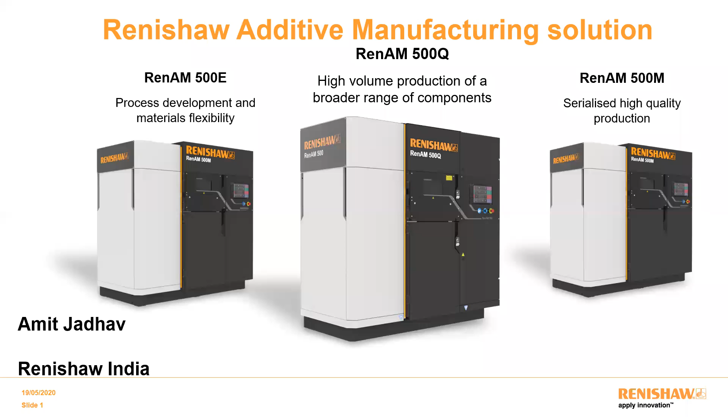During this presentation, we'll see what exactly Renishaw is, what's our core business, why Renishaw, then what is 3D printing. Specifically, we'll look at metal 3D printing, what it is, how it's affecting current applications, and its use. We'll see the entire process chain, how it flows from the CAD model to the final finished parts. We'll quickly overview the benefits of 3D printing, factors considered for metal 3D printing, and I'll focus on some metal 3D printing applications widely used nowadays. Last but not least, our offerings in a few slides.

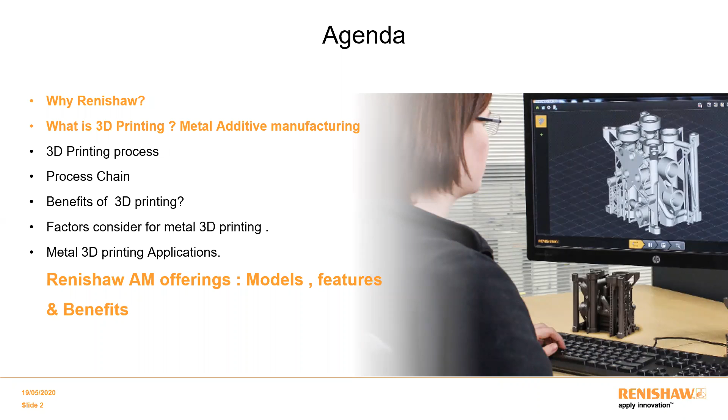So this is about Renishaw. Renishaw's core business is metrology and inspection. Apart from additives, Renishaw's main business is metrology, where quality is required. We have our own products like CMM measurement probes, machine tool probes, and gauging systems. Apart from that, we also manufacture a product called Raman spectroscopy to detect the chemical composition in pharmaceutical industries, for example medicine or tablets. For detection of these composites, we manufactured Raman spectroscopy, widely used in pharmaceutical industries. We also manufacture robotic arms for delivery of drugs in critical operations.

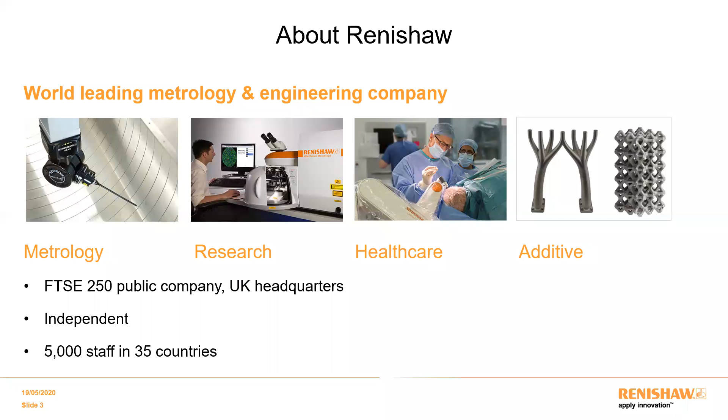Apart from all this, we also manufacture machines for additive manufacturing in metal. Specifically, we don't deal in plastic. In metal, we started our journey in 2011 when Renishaw bought a company in the UK called MTT Technologies, who were in metal 3D printing for the last 20 years. Since then, from 2011, we started manufacturing the machine in the UK. Renishaw is an FTSE 250 public company. Our manufacturing facilities are in the UK, Ireland, and partially in India, with more than 5,000 staff in 35 countries.

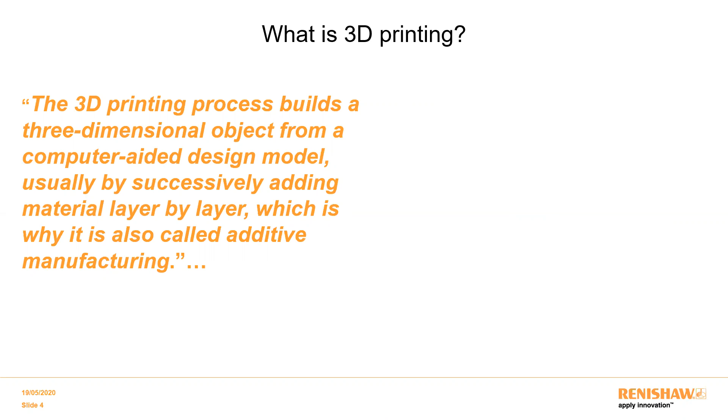So we'll start the presentation with 3D printing. This is a basic definition from Wikipedia: 3D printing is any 3D CAD model which you design in the computer, and you get the physical appearance through machines — that's called 3D printing. Nowadays, 3D printing is also known as additive manufacturing, which is exactly the reverse of subtractive manufacturing. It's called additive because it's an addition of layer one over the other. So rapid prototyping, 3D printing, additive manufacturing — these are a few terminologies of 3D printing.

Nowadays it's very popular — plastic has almost reached every home. But for metals, yes, the Indian market is maturing day by day, and people are starting to use and take advantage of metal 3D printing across applications. I will also go through the applications later in the slides. So 3D printing is nothing but additive manufacturing — when you design something, you get exactly the same component with the same dimensions from the machine, without any manual intervention. That is what is called additive manufacturing.

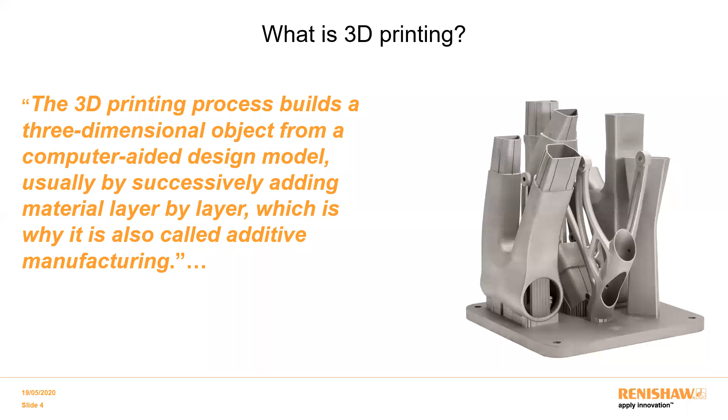So this is the basic things. There are two differentiations in 3D printing. One is polymer, one is metal.

Polymer, I hope everyone is aware about polymer 3D printing, or many of you have seen metal 3D printing as well. In polymer, the popular technologies are there, very popular nowadays, and each and every manufacturer has manufactured their machine on the basis of this technology. So in polymer also, there are four major technologies, and on the basis of that, manufacturers have manufactured their machines.

Fused deposition modeling, where raw material is in wire form, gets fused with high temperature, and then layer by layer manufacturing happens. Selective laser sintering, I hope you are aware, is a powder and laser based technology.

And then stereolithography. Apart from that, inkjet technology now. Stratasys has already launched that technology a long time back, but now with some new innovations, HP has launched their machine in polyjet or inkjet technology, where raw material gets sprayed on the bed, and with the help of UV light, it gets sintered and then solidified.

In metal, similarly to plastic, metal also has a few technologies like selective laser melting, short form SLM, or direct metal laser sintering, or laser powder bed fusion. The terminologies are different, but if you see, the technologies are almost similar. SLM, DMLS, and LPBF - most of the time people use these short forms. The terminologies are different, but the technologies are similar.

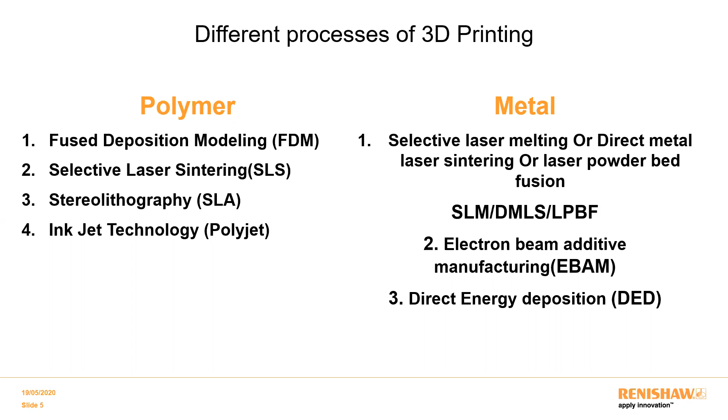Like plastic, you also design the part, then you print, giving that input to the machines, and then start manufacturing the parts, then remove the parts and remove the support. In metal also, two factors are considered: support structure and the actual material.

Support is less than 10%, depending on how you orient the part. So the process starts from designing the part, and once you design it, save it into STL. Like plastic, metal also accepts STL data. In fact, all 3D printing technologies ultimately need to be converted into STL format, whatever format you design the part in, and then give this input to the machine software.

In the machine software, it gets programmed. You will get the number of layers, number of hours, and amount of material required to manufacture the part. Then you start the process in the machine. Once it is done, you remove the part and measure it as per your dimension - if it's not printed correctly, you need to machine it out, removing unwanted materials and support structures until the final part comes out. This is the basic flow, which remains the same throughout all metal technologies.

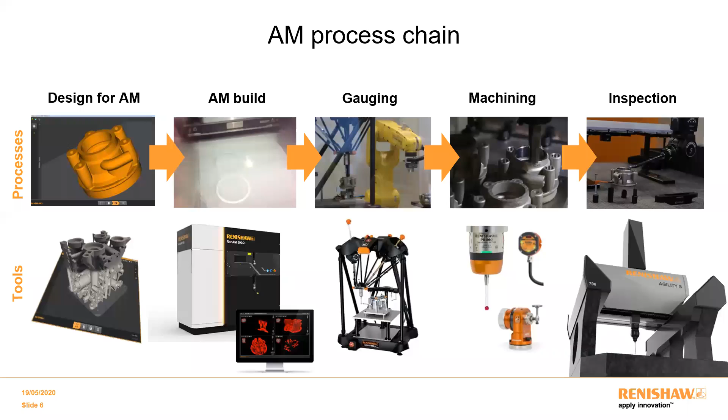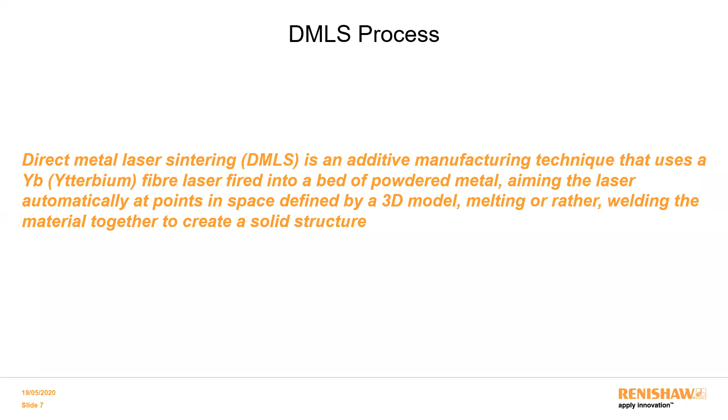So DMLS, again the definition from Wikipedia: DMLS is the process where a laser source solidifies the powder, and layer by layer manufacturing happens as per your CAD data.

I'll just play the video - please let me know if this is not visible. This video has no sound. This is our multi-laser sintering machine, which is high-end, but the terminology and technology remain the same. See this video for 3D printing - we shot this video from our own machine. I'll play it now.

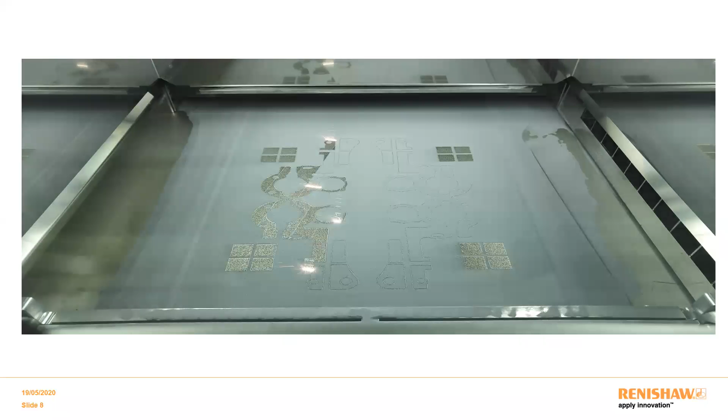How is sintering done? There is a layer of powder spread across the platform, and sintering happens with 4 lasers simultaneously. You can define the layer thickness as per your requirement, from 20 micron to 100 micron, selecting based on the profile and the accuracy required for the part.

Again the new layer will come and the process will continue.

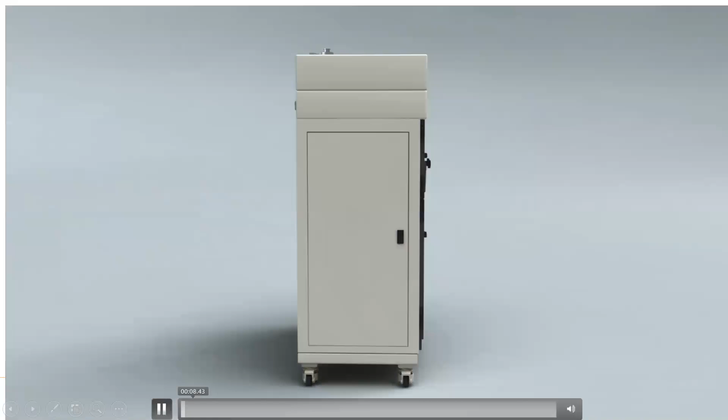Now, in this video, I will explain from the start to the complete removal of the parts, how the machine works, so that you will understand easily. I believe seeing is believing - that's why I'm playing this video.

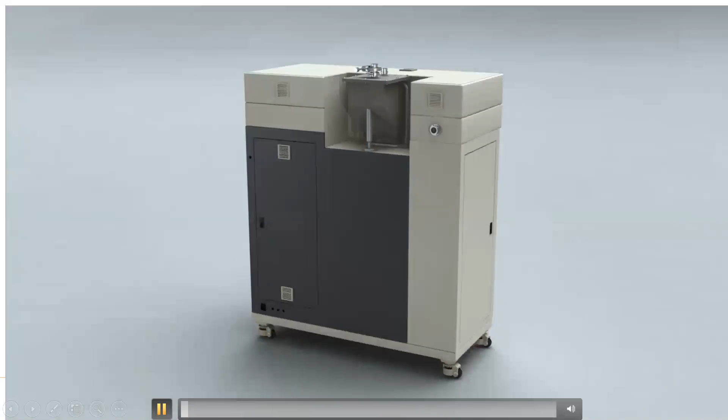How the powder gets deposited into the machine, how it's spread on the platform, how the laser works, and how we remove the parts - by seeing this video, most of your doubts will get cleared, and I'll explain further. From the backside of the machine, powder gets loaded into it.

Whatever the powder - aluminum, stainless steel, nickel alloy, titanium, cobalt chrome, whatever material is required - you just put that powder into the machine. This is a hopper at the backside of the machine where we load the powder, feeding it through this flask.

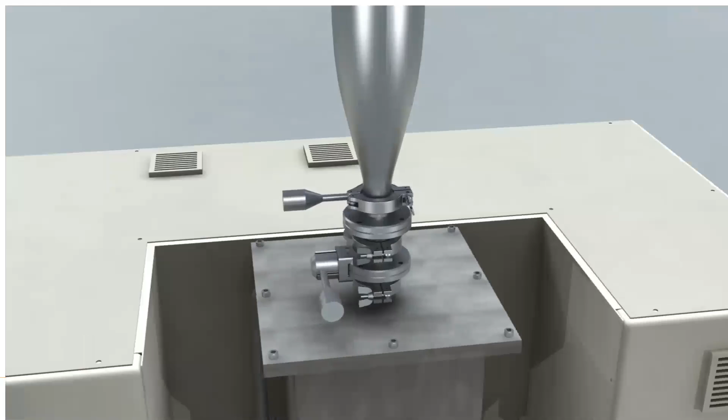During the entire process, the powder does not get exposed to the external environment, so it does not oxidize, and you get better mechanical properties and better quality parts. This is a basic view of the chamber.

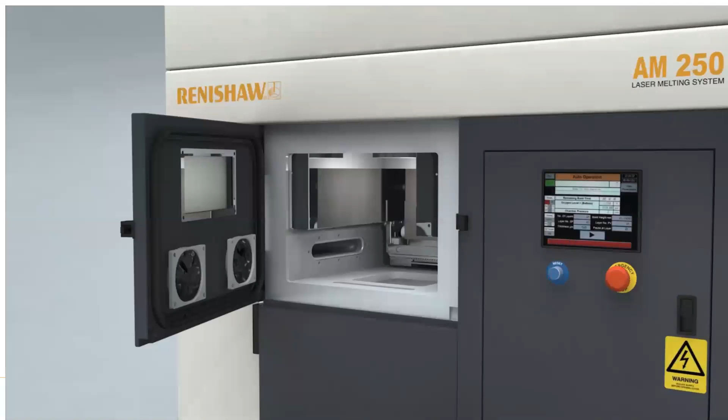Now the substrate gets placed into the machine. 250 by 250 is the bed size and height is 250 mm. On that substrate, the machine software is preparing the CAD data.

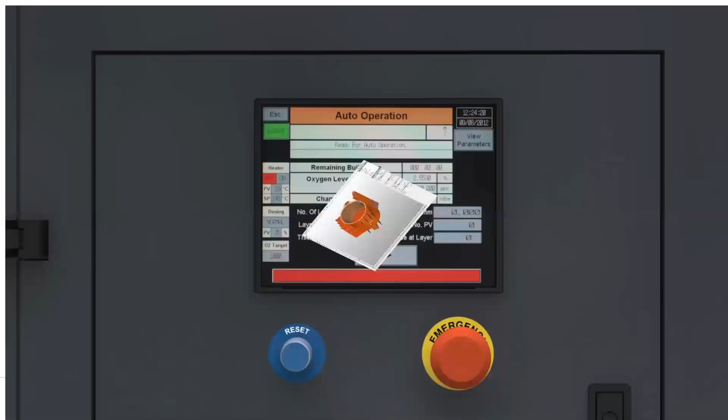It converts the data into a number of slices and support structures we need to generate for the machine, then we give this input to the machine.

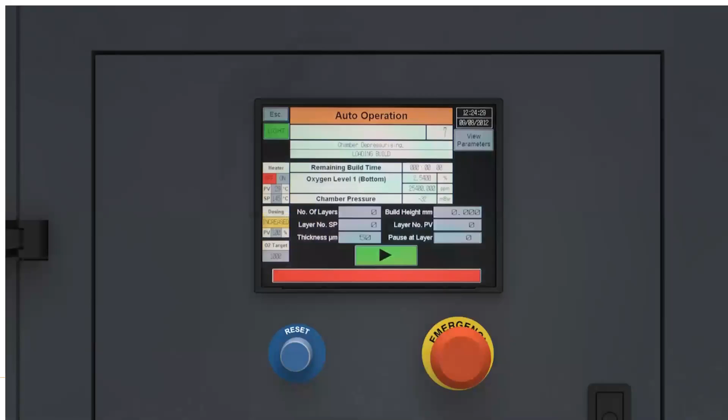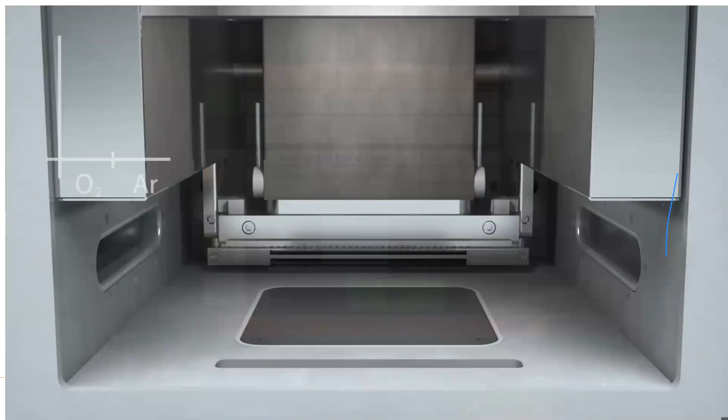The machine ensures proper gas levels inside - we remove the oxygen from the machine. This is chamber preparation to avoid oxidation of the powder. We remove all the oxygen and then purge argon gas to maintain purity during the manufacturing process, so argon gas flows in.

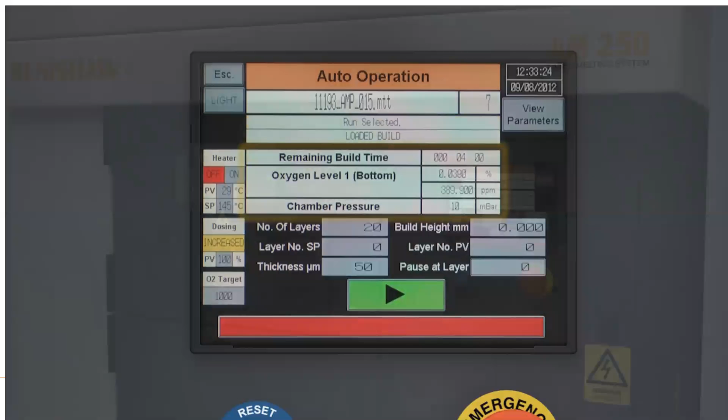We deposit a minimum of 900 liters of argon to avoid oxidation during the process and maintain minimum oxygen levels. This is the basic principle of 3D printing technology in metal. In plastic, you don't require all these things - yes, in SLS it's required, but other technologies don't need it.

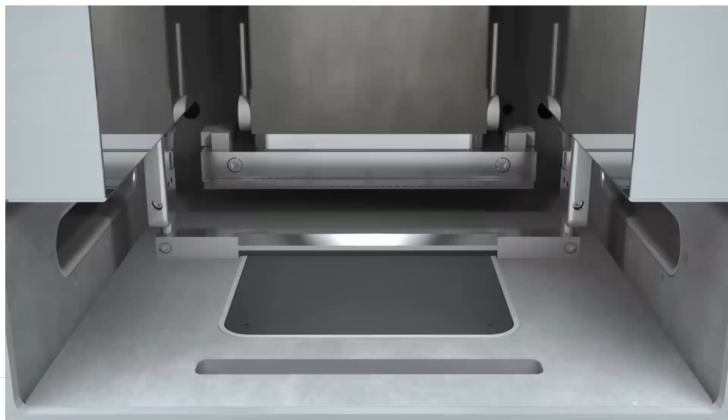Then through the laser source, it will start manufacturing. A recoater spreads a 30 micron layer on the platform, and the laser sinters it as per the geometry of the CAD part. This process continues till the completion of the part.

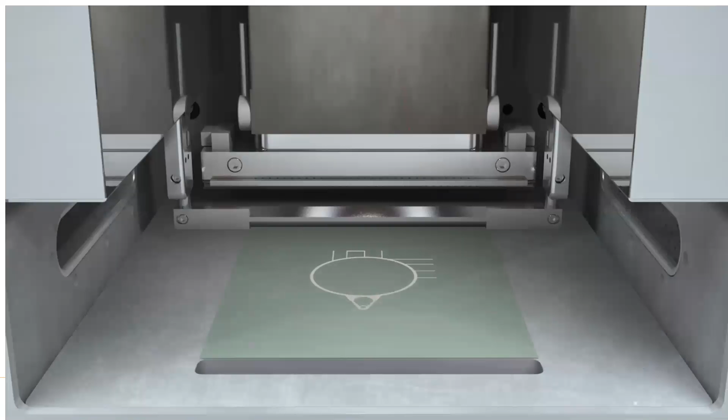Every time, the bed gets lowered by 30 micron or the desired height of the build.

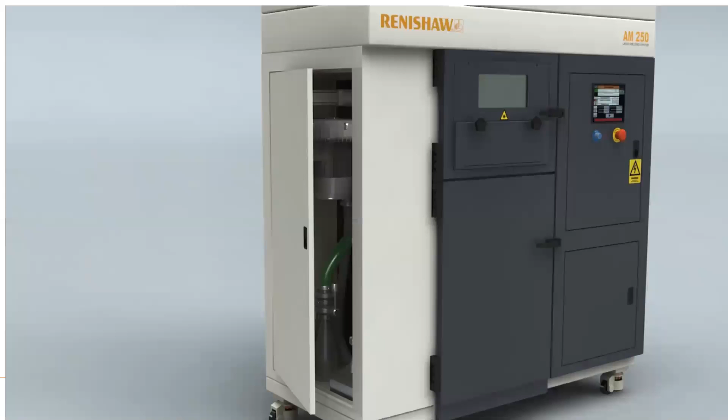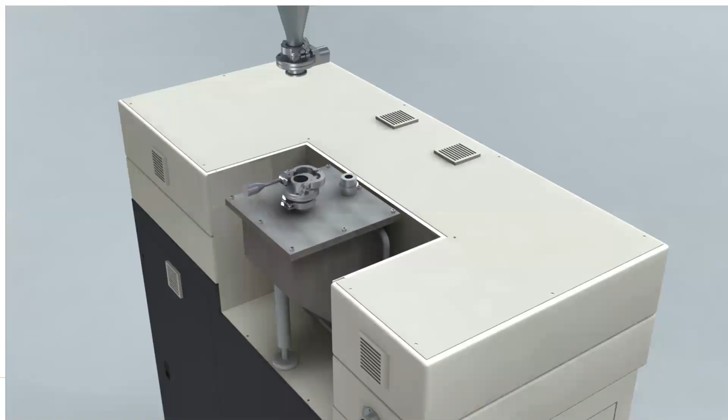The excess powder gets collected into the collector, and we sieve that powder, removing unwanted material from that collection. The fine powder is then reused for the next build. If you ask me, the wastage is very minimal in this process, and again we continue the process.

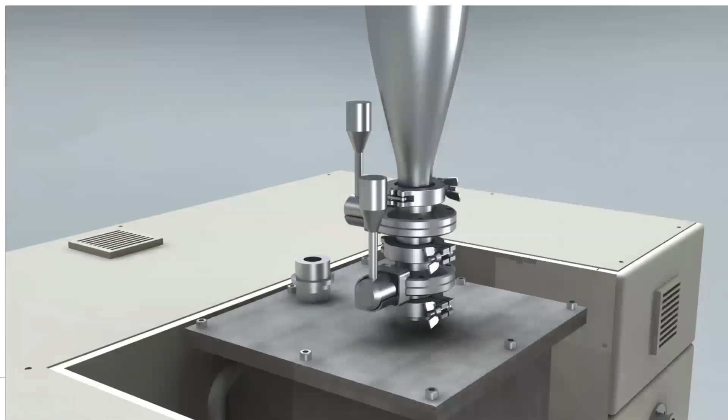This process is continued until the complete part is made.

Now we see the AM deployment, where it is beneficial or where it has been used so far, particularly the deployment of additive manufacturing in metal.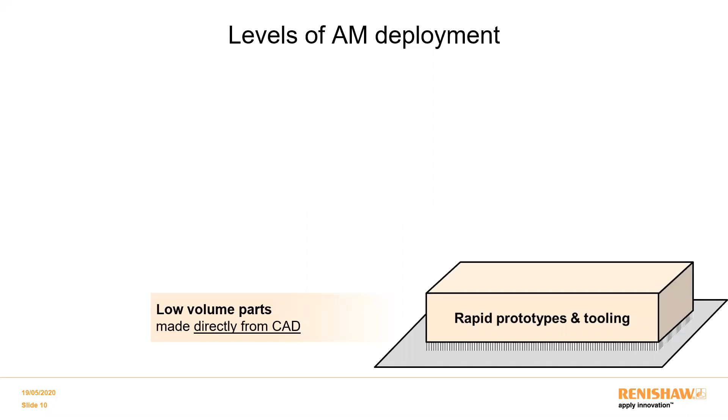Most of the time people are using additive manufacturing in metal for applications like rapid prototyping and tooling.

Then direct part replacement. This is one of the unique applications in metal 3D printing, where the volume is low and manufacturing cost is huge. For just 10 to 50 numbers, no one will give you dies and molds, no one can manufacture for you for such low volume unless it is very unique. In this case, you can use the part directly through metal 3D printing. You design the particular part, and if your volume is low, you directly use the same thing on the actual vehicle or engine. That is why it is called direct part replacement.

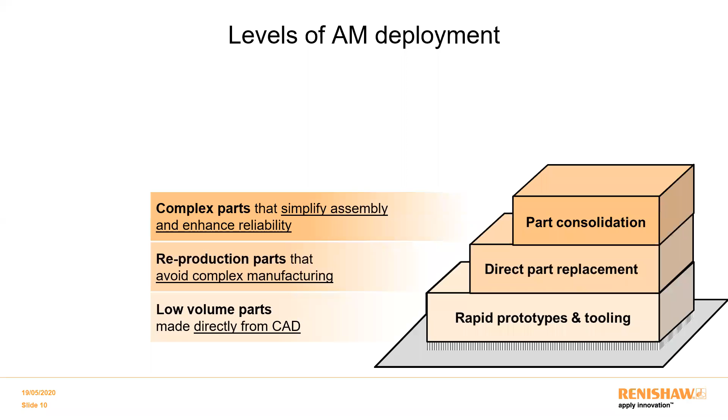Part consolidation: for example, in conventional manufacturing, if you want to make 5 to 6 parts and assemble them with nuts and bolts, but if you are able to design the entire assembly as a single part, then you can print or manufacture the entire assembly without adding multiple parts. As a single part, you can print it through metal manufacturing.

And last but not least, DFAM optimize. DFAM stands for design for additive manufacturing. Nowadays, in the aerospace or automotive industry, people are using design for AM to manufacture their conventional parts, to reduce overall costing and minimize time.

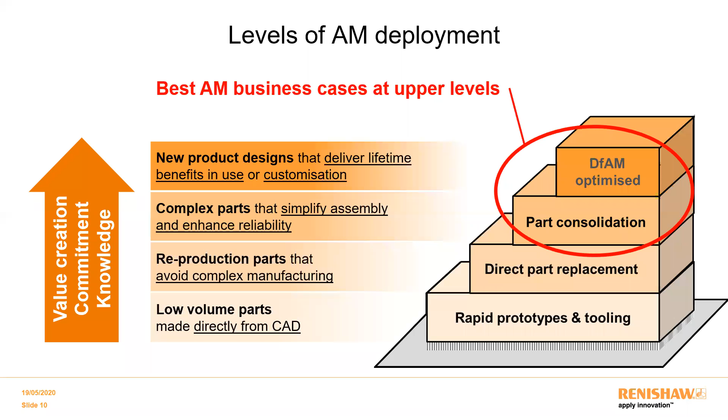So these are the best applications where AM is used nowadays: part consolidation and DFAM optimize. How it works, I will show you in the next slide.

If I select my component for metal 3D printing, my product gets benefited with less weight and faster product launching. Let's say I design in the morning, and in the evening while going home, I give this input to the machine. By midnight, the machine will print that part. Next morning, you get the part in your hand. This is the main benefit of 3D printing.

Then product reliability is there. Whatever you have designed, you will get exactly the same, with whatever parameters you set during the design of the part.

Higher performance: metal 3D printing is one of the most reliable technologies where you get higher performance than any other technology. Product attraction is also there.

You can design the part however you want, whatever you decide to design. It's not like conventional manufacturing, where the designer thinks about manufacturing capability with respect to final production, designing the part in that constrained way, considering which machine to manufacture on, for example 3-axis or 5-axis, and understanding the constraints of conventional manufacturing. But in metal 3D printing there is no such limitation. You get the part exactly as it comes in your mind.

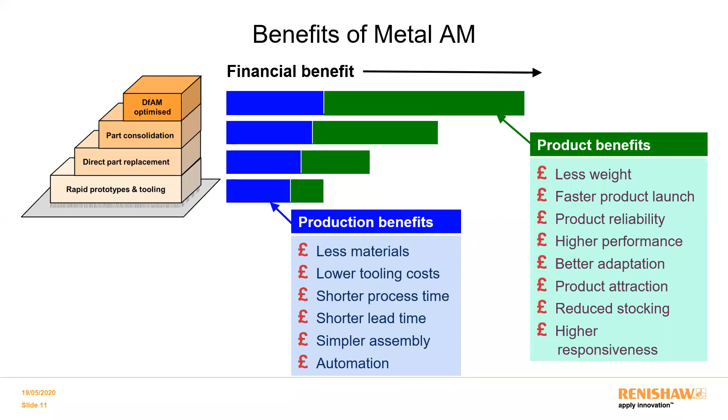Factors considered for metal 3D printing. In polymer, in plastic, thousands of materials are readily and easily available, and more or less people can buy it from the local market. You can buy your spool, or you can buy the powder from the local market, and immediately process it, because risk is minimum. If your part is not up to the mark in polymer, you can throw that part and print the next one, because cost is very less. In metal it's not like that.

Material availability is the essential thing in metal 3D printing. There are around, you can say, less than 50 metals available all over the world. Scientists are researching new materials day in and day out. But so far, as per my knowledge, 20 to 30 materials are readily available for printing.

Again, material selection depends on your final requirement. You cannot take any raw material and process it in the metal machine, because so many factors are considered. For example, weldability and the melting properties of the material are essential things in metal 3D printing. If you are not able to weld the material, or if you are not able to weld the powder, then there is no use of that raw material. That is the reason.

So far, stainless steel, aluminum, nickel alloy, cobalt chrome, titanium are widely used materials in the industry. Apart from that, if any other materials are there, you can anytime research it and make that material available for the applications.

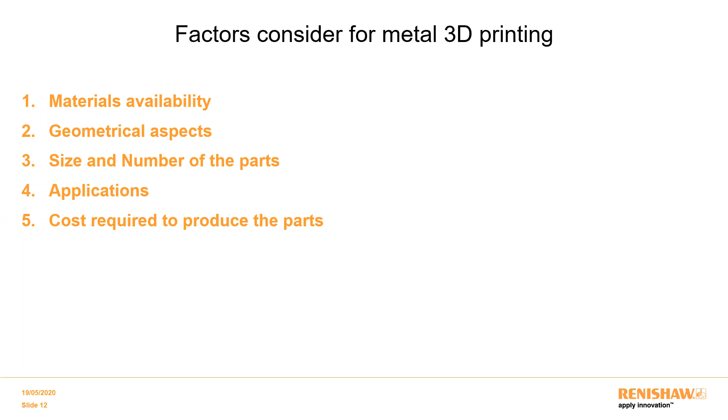As I said, metal additive manufacturing is best suited for high value and low volume parts, where your volume is very less and cost is very high. Then and only then you can use this technology.

There are many industries already using 3D printing, but I have shortlisted a few important ones: automotive, aerospace, tooling and dies, medical and healthcare, defense and security, and education and research.

We'll see one by one what are the different applications in automotive. There are hundreds of applications in the automotive industry. I'm trying to cover a few of them because of time limitations and for your understanding, so I have shortlisted some applications.

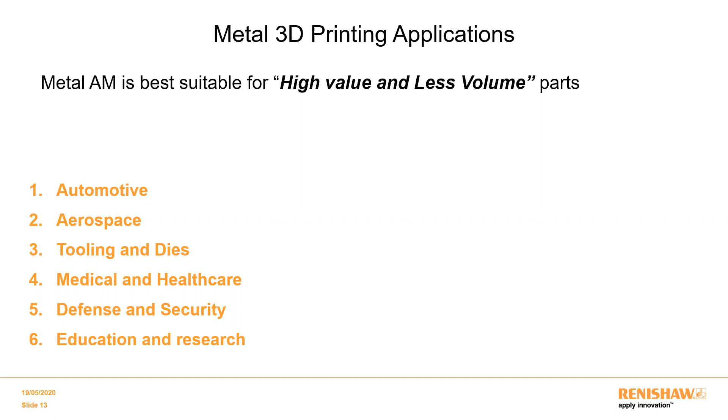Just see, we manufactured a nozzle tip for this supersonic car because volume is less and it's a unique application. In conventional manufacturing, you will not get that much angle and that much finish. Imagine this car is able to perform at 1,000 miles per hour. We used titanium material to manufacture the nozzle tip of this supersonic car. If I wanted to manufacture this in a conventional way, it would be a nightmare.

So that is the reason this is a unique application, like when you want to manufacture a limited edition car, and the uniqueness of the car is that it needs to perform in a certain way where the overall weight of the car is very vital.

In that case, you can select to manufacture with less weight to reduce the overall weight.

3D printing in titanium is very easy because it gets solidified and you get the part directly out of the machine. But no one will touch that part in conventional manufacturing because of the wastage. Titanium is very expensive, it's not a day-in-day-out material, and it's very challenging to cut. So most manufacturers avoid making things in titanium because of the wastage, the number of tools required to cut the material, and accuracy concerns. That is the reason 3D printing in titanium is very useful.

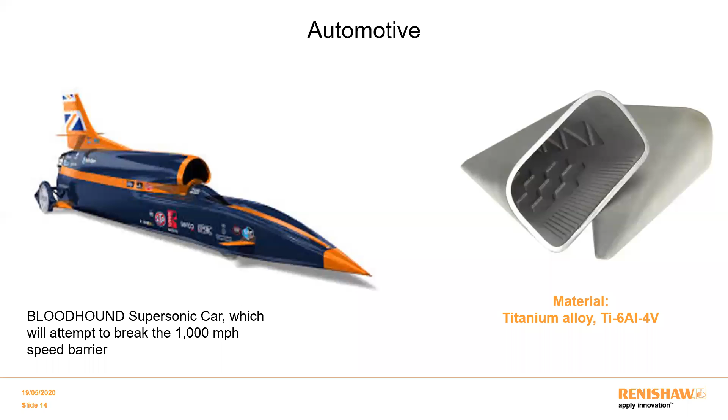Design for additive manufacturing is a concept, and here we have a car hinge, a door hinge for a concept car, manufactured in aluminum. If you look at this part, you'll understand it does not require support. We optimized the entire part using a Dassault Systemes software, a joint venture between Renishaw and Dassault Systemes for the concept car called Blue. We decided to manufacture this door hinge through metal additive manufacturing because there was very little space available and the weight of the part needed to be very low. We manufactured it in a vertical orientation where it doesn't require any support, but I believe in conventional manufacturing you cannot maintain this angle, making it very difficult to produce. In this case we only needed to manufacture 5 to 6 units, so it's easy to do through this technology. It's aluminum, very lightweight compared to conventional methods, and very unique in its application.

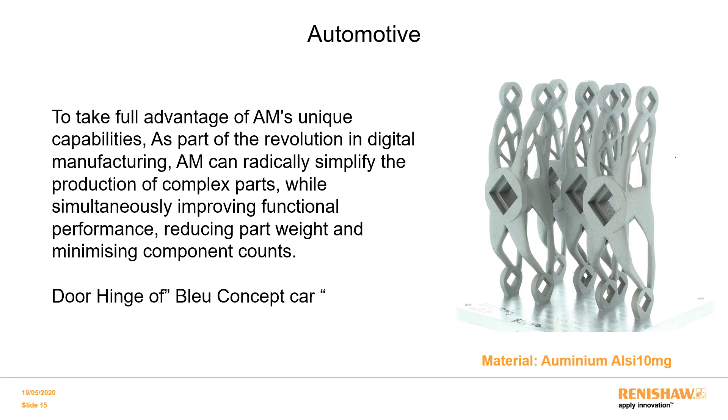Moog is a leading aerospace manufacturer. We designed this actuator, or hydraulic manifold, through this technology. Because of the intricate shape, we were not able to manufacture it using conventional methods, so we decided to manufacture it through 3D printing.

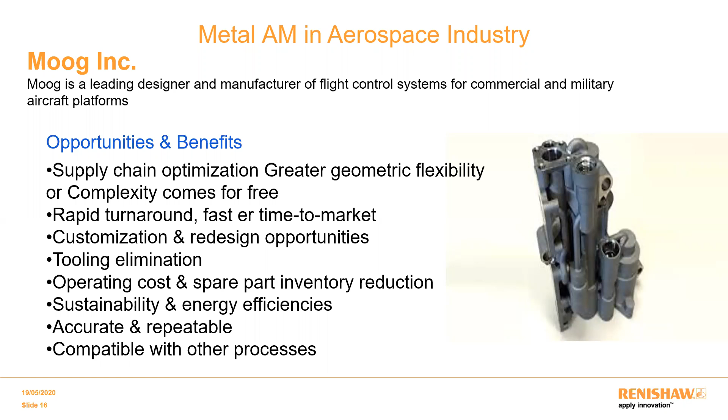For this Indian manufacturer, we manufactured this CAN combustor in Inconel 625, where the layer thickness was 60 microns, there were 4,600 layers, and the build time was 22 hours. We manufactured this part for aerospace industries at our Pune facility. Like this, if your volume is low, you can select any component within that dimension and easily get the part out of the machine.

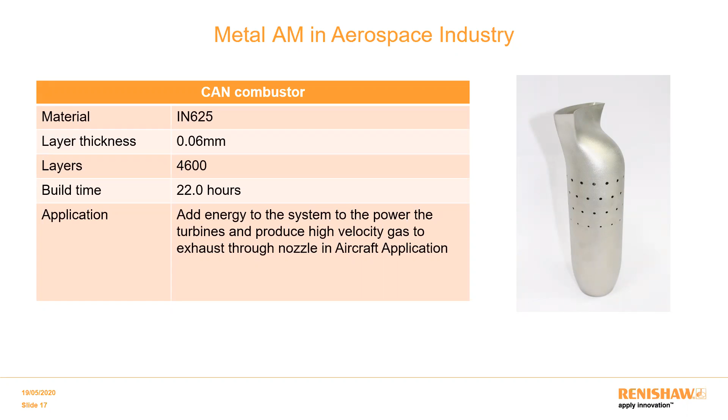Topology optimization is playing an important role in 3D printing nowadays. Design for additive manufacturing is one concept, and topology optimization is another. This is a bracket for a satellite, and you can see there's a honeycomb structure inside that part. We analyzed this with the help of Altair and Materialise software to optimize the part. We optimized it so that where it requires load or stress, we solidified that region, but for the rest of the structure we used a honeycomb pattern since it bears minimum load compared to a solid structure. That's why you see this honeycomb structure, which is very lightweight. This is only possible with 3D printing—you can't even imagine manufacturing this through conventional manufacturing.

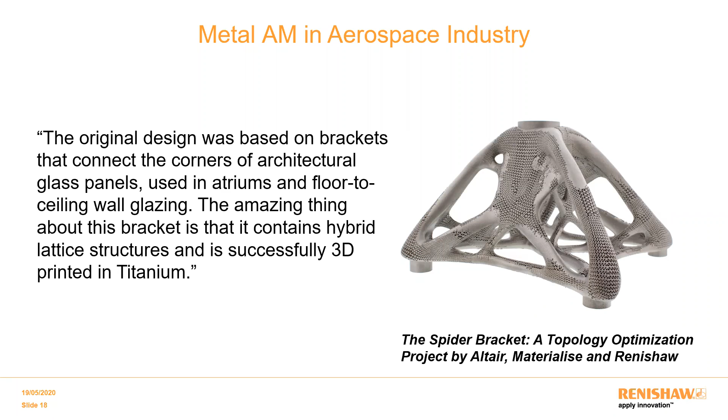Tooling and dies—in India, I've observed this is a sector growing very rapidly. In conventional tooling, most of the time the cooling channels are either along the x-axis or y-axis, or not very close to the profile, because of manufacturing limitations. It's a conventional manufacturing limitation.

Any tool designer will design in such a way that he should be able to manufacture through the conventional way, otherwise he will not design the part. But let's say that designer, if you ask him, design whatever way you think, design your inserts. Only thing is that I need better quality parts, and I need my mold to cool within less seconds.

So he will design cooling channels along with the profile of the part, so that you can avoid issues like warpage, shrinkage, sink marks. You can avoid that issue if you are able to cool down the mold very easily. In this tooling industry, we are able to design a cooling channel along with the profile of the part, or along with the profile of the insert.

Again, the cooling channels are simulated in particular software. You cannot just design as per the profile and manufacture the part, it's not like that. There are some simulations. So many geometrical aspects need to be considered, cooling channel need to be considered. But yes, once you are able to design the proper cooling channels along with the profile of the part, then metal 3D printing will give you the parts exactly the same as what you have designed.

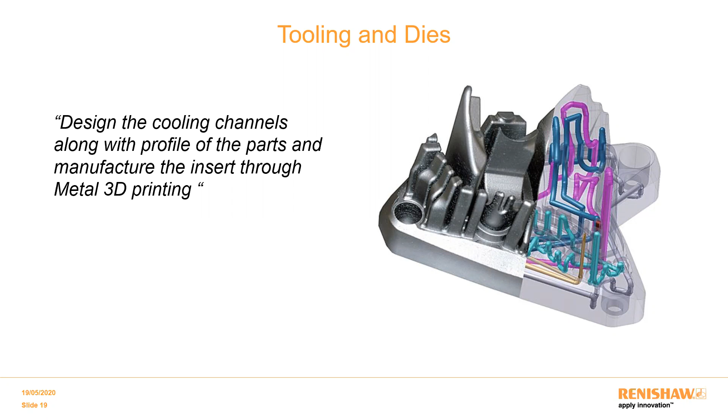Medical and healthcare in India, because of the limitations of surgeries, medical is an important application in 3D printing, where you can manufacture the actual cranial implant of the patient. You understand? Just think, each patient has their own requirement of the implant, each patient has their own challenges and problems. So volume is very less.

In fact, only one time you need to manufacture that implant, because it's patient specific. So conventional manufacturing is very challenging at the moment. People are still managing these things, but if they use 3D printing, their life is easier than the conventional way. Imagine cranial implants - you can see on the left hand side there is a cranial implant.

In cranial implant, you will be able to get exactly the same implant that your patient requires. For example, the affected area - I will explain the process of how it gets manufactured. The affected area gets scanned through CT scan data, and through the scan you will get data in CT scan format. You need to convert that CT scan format into 3D format, and through the 3D format you can print that part in metal 3D printing, in titanium material, or if it's a dental part, then it's cobalt chrome. If it's a maxillofacial part, then it's in titanium, which is very lightweight.

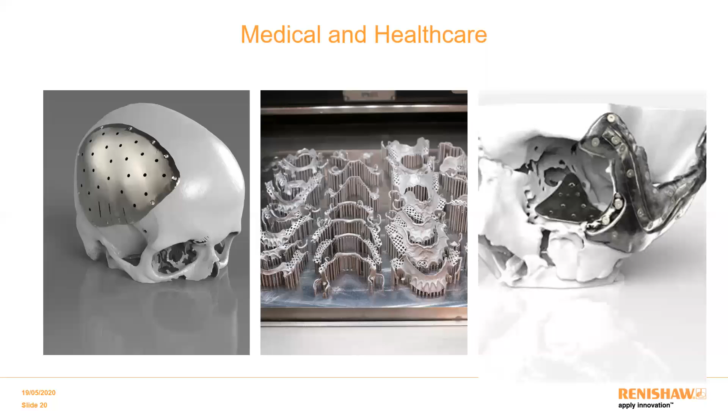So this is one example of what you can call topological optimization or design optimization. We were able to manufacture 320 parts in a single go in 19 hours. Just imagine, 19 hours in our high-end machine, which has four lasers operating simultaneously, as I showed in the earlier video. That's our four laser machine, and that's the reason we were able to manufacture all 320 parts in just 19 hours. If we calculate all the resources and consider everything, it costs 385 rupees plus taxes. That's it, so it's very economical.

But you need to understand the application first. It's not suitable for each and every application. We call this stack building, one above the other. You can see we have stacked the entire thing and this has occupied the entire build volume. So this is one of the unique applications in 3D printing.

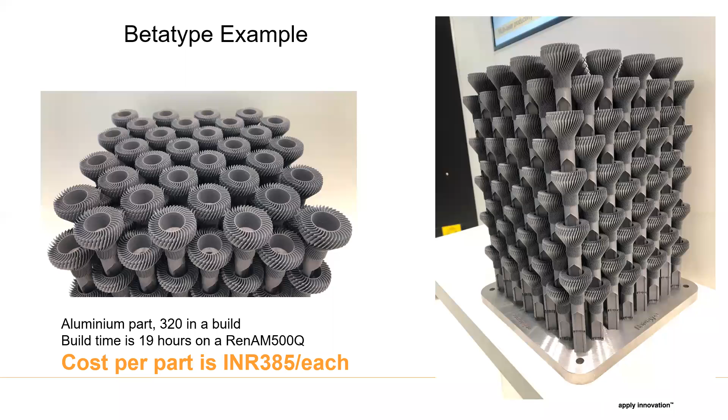I would like to explain one of the recent case studies we did in our Pune facility. There was a challenge from the hydraulic industry where the overall weight of their part was around 7 to 8 kg, and the pressure drop was huge. So we shortlisted that case study to manufacture through 3D printing and decided to take it up.

On the left hand side you can see the conventional manifold. This manifold is manufactured through conventional manufacturing. That's the reason you can see the entire block with holes and mounting holes. But if you redesign it, you can remove the unwanted material through experience or through CAD software, because I don't have any challenges in 3D printing. In conventional manufacturing, removing material is challenging. In additive manufacturing, adding material is challenging. So minimum material is very useful in additive manufacturing as compared to the conventional one.

So in conventional manufacturing, because removal of material is challenging, this is a solid block. But if you want to design for 3D printing, I would design the middle one. See the middle one, I've removed the unwanted material. The mounting holes are the same, the application is the same. It's more useful than the conventional one because it's lightweight. I removed the unwanted material and arrived at this design.

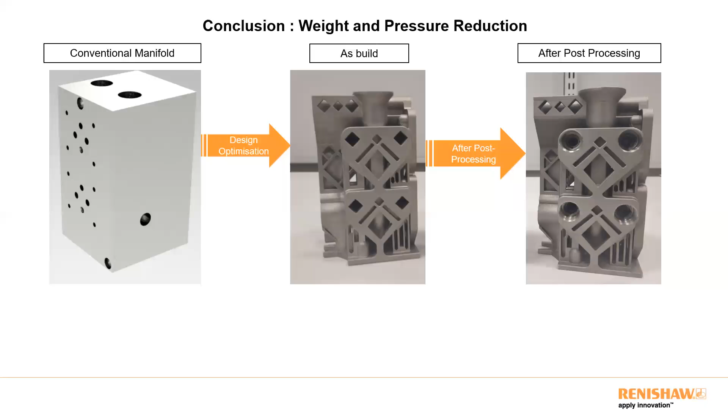And after post processing, like some machining - if you see the middle part and the after-post-processing part, you'll understand we've done machining on the extreme right hand side part. In the middle part you can see squares at the place of the mounting holes, but in post processing we've machined them circular so it gets mounted wherever required.

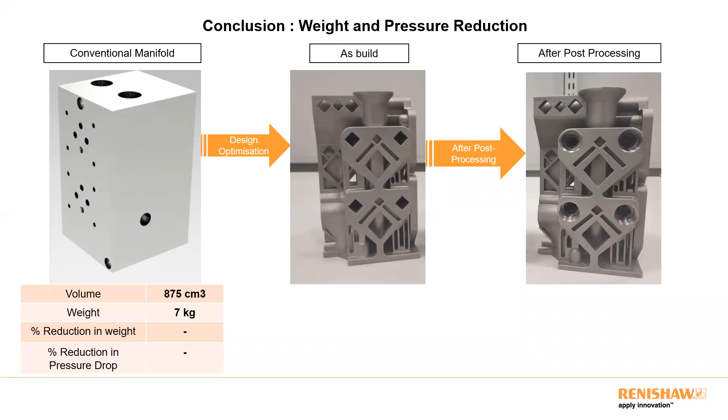But let's see the benefit now. Initially the volume was 875 cubic centimeters in conventional manufacturing and the weight was 7 kg. In 3D printing, the volume was just 280 cubic centimeters because I only print what I require - unwanted material has already been removed. So the weight of the part is 2.2 kg. Weight reduction is 68% as-built, without post processing.

But if I post process it, the volume becomes just 247 cubic centimeters, and the weight is around 2 kg. So the overall weight reduction is from the conventional 7 kg down to 2 kg, and the pressure drop has been reduced by 30%.

So this exercise we did in our Pune facility. You need to understand where you can use design optimization and remove unwanted material in a way that's suitable for 3D printing - this is how you can use 3D printing. Otherwise, you'll feel that this technology is very expensive and not useful for day-to-day operations. But it's not like that. If you understand this technology thoroughly, you'll start taking interest in it and apply it in your day-to-day applications as well.

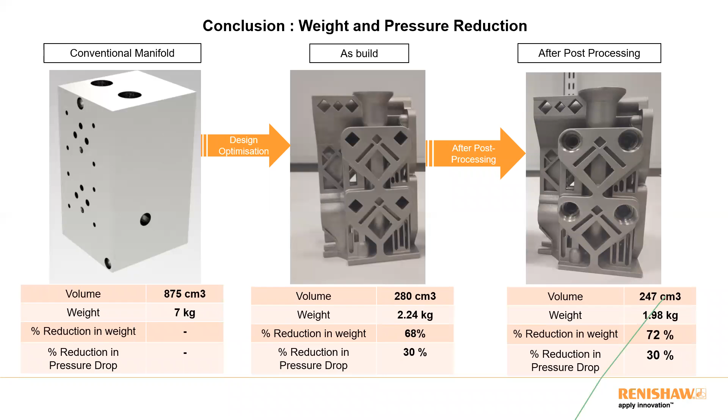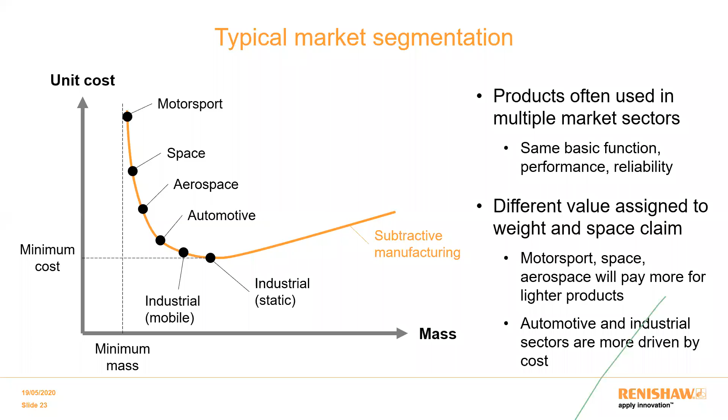But if you use it in day-out operation, then your cost will be huge. So that is the reason, if your volume is more, I'll suggest go with a subtractive one like sand casting, or any other metal casting or die casting, injection molding, or something like that.

In metal, Renishaw's machines are easy to operate and very flexible to use with a number of materials. For example, if today you are using aluminum in the machine, in the evening you want to change that material and load stainless steel, then still you can do that, because changing material is very easy in our 500E series machine. It is designed for research and day-in-day-out application purposes. Technology remains the same throughout all our machines. Let's say tomorrow you want to use this machine for a different application like aerospace, and you want to load the titanium part - then you can do it in 500E. But in 500Q, because of the complete automation system, changing the material is quite cumbersome. So that is the reason 500Q is best suitable for a single material. If we want to run the entire year just in stainless steel, then I'll suggest think about 500Q.

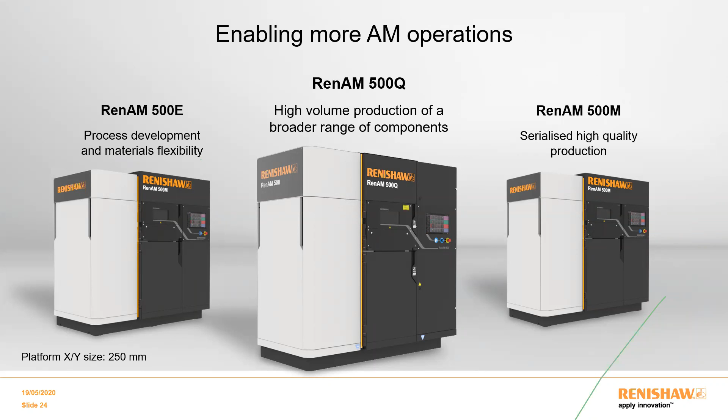Any doubts so far? Because I have completed the entire product presentation, just a minute.

I'll just give you a brief explanation about our 500E. In 500E, we can monitor each and every layer of manufacturing through our external software. You can monitor whatever you are printing - there is inbuilt software, inbuilt cameras. You can see on your computer screen exactly what is going on inside the machine. At any layer, if you have any doubts, immediately you can pause the machine, correct those things, and run the part again, or load a different part if you found any problem. So you can monitor the entire thing in our InfiniAM software. This is the uniqueness of 500E as compared to any other competitive machines.

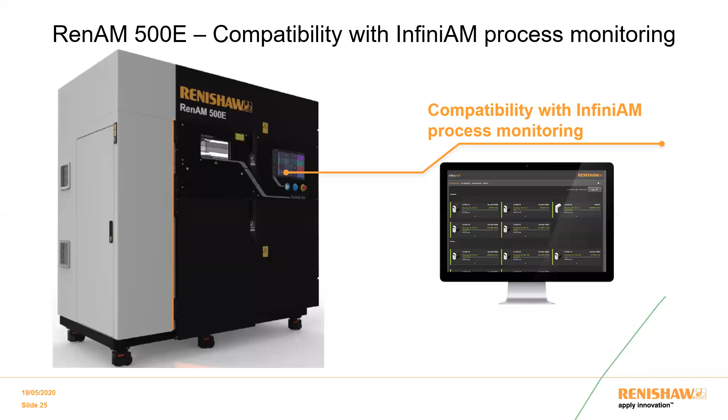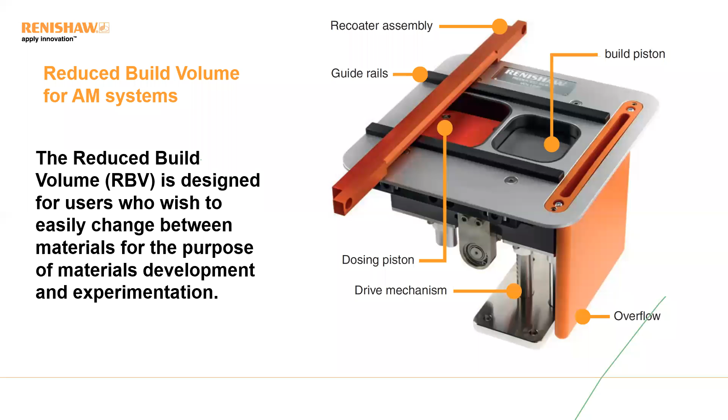So this is all about the 500E, or metal 3D printing, and I have covered almost my session. If anyone has any doubt on this, please ask me - I'm just going through the chat box now.

Thank you, Amit. Any doubt, sir? Thank you very much for the wonderful session. Yes, sir. Yeah, of course, I think there will be some questions.

First of all, how does metal 3D printing compare with conventional powder metallurgy products? In metal 3D printing, conventional powder metallurgy products you can get easily from the market. But here, to manufacture the powder, there is gas atomized powder. That is the basic thing, and nowadays very few manufacturers across the world make it. So the uniqueness of this technology is you need to get that powder through gas atomized powder only. Then and only then can you melt that powder and solidify it. In conventional metallurgy, this will not be the process, and applications are very rare in this metal 3D printing. Conventionally, there is also a limitation of sizes, and limitation of overall part removal, support removal or material removal.